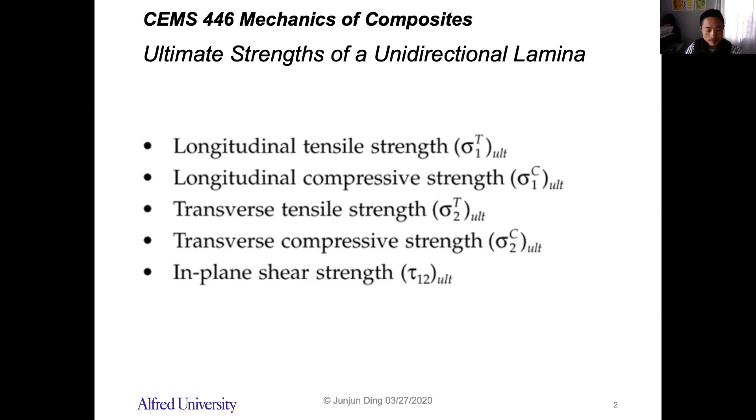Now we assume the fiber and matrix are both isotropic and homogeneous and linearly elastic until failure. That's the assumption for this model.

The failure strain for the matrix is higher than the fiber, which is the case for most polymer matrix composites. For example, for glass fiber reinforced epoxy composite, the glass fiber fails at a strain around 3 to 5%, while the matrix material, epoxy, fails at a strain around 9 to 10%.

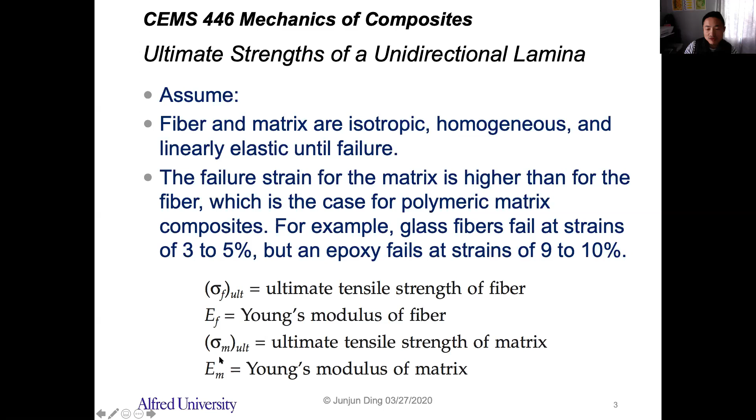So usually for the polymer matrix composite, the maximum strain for the fiber is smaller than the maximum strain for the matrix. We show the ultimate strength for the fiber expressed in this way, along with the Young's modulus of the fiber, the ultimate tensile strength of the matrix, and the Young's modulus of the matrix.

You'll see that the maximum strain that can be applied to the composite and the fiber is the same, because if the fiber fails, the composite fails. That's why the maximum strain for the fiber and the composite is the same as the ultimate strain of the fiber.

While the matrix has a much larger ultimate strain, that is usually true for most composites, especially polymer matrix composites. Now what about the stress for the composite, fiber, and matrix?

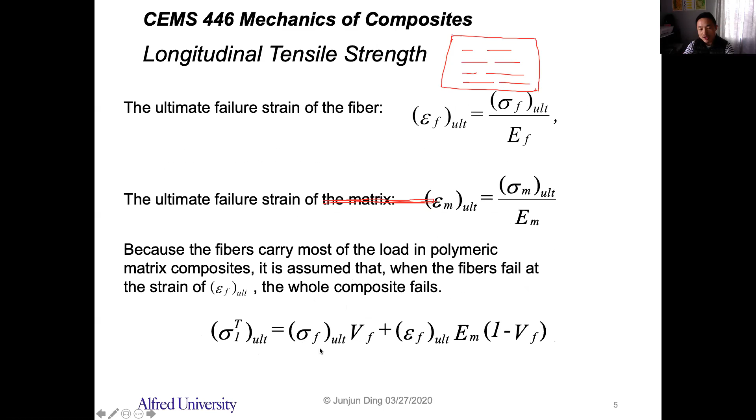So we have to compare with those two. This is the case after the fiber fails, this is the case before the fiber fails. So we want this one to be larger than before the fiber fails. Therefore you can calculate the volume fraction of the fiber. The minimum volume fraction of the fiber can be expressed by the ultimate stress of the matrix, ultimate stress of the fiber, Young's modulus of the matrix and the fiber.

Is that right? So the key is that if you want to find out if the composite can take more load after the fibers are broken, you have to derive it based on this equation, this relation. This relation means the composite can take more load - this is higher ultimate strength after the fiber breaks, this is the ultimate strength before the fiber is broken.

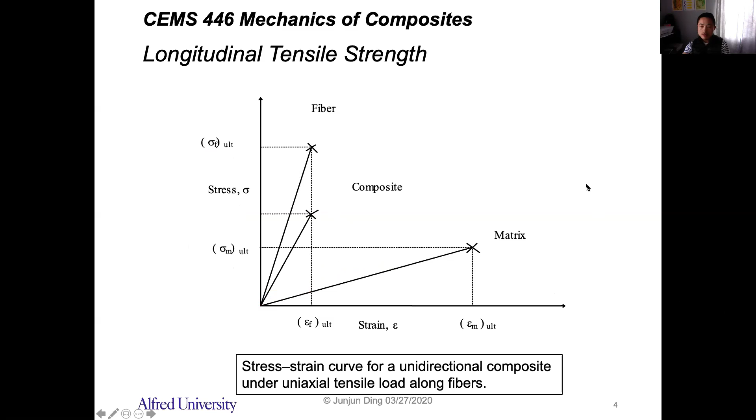So there's a critical volume fraction of the fiber that has to be reached to effectively increase your ultimate strength of the composite. So if we compare this ultimate strength of the matrix and the ultimate strength of the composite, if the ultimate strength of the matrix is larger than the composite, that is bad. So in this way, we can calculate this critical fiber volume fraction based on this equation.

Is that right? If you want the ultimate strength of the composite to be higher than the ultimate strength of the matrix, you want your volume fraction of the fiber larger than the critical volume fraction of fiber. Is that right?

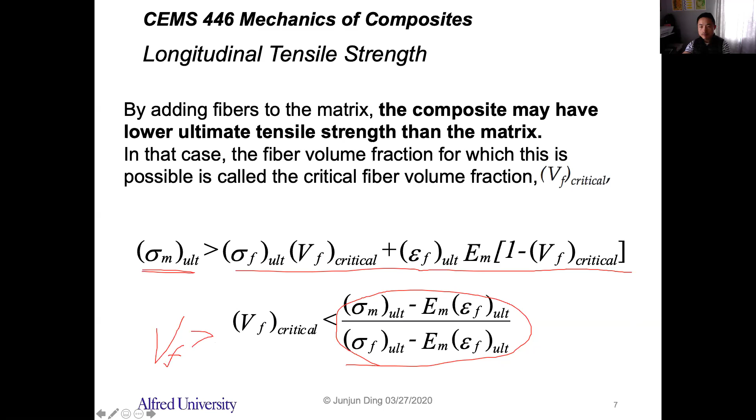Okay, so now let's look at the example. First of all, I want to show you guys the typical properties of fibers: graphite, glass, and aramid fiber. You can find the axial modulus, transverse modulus, Poisson's ratio, transverse Poisson's ratio, shear modulus in the axial direction, coefficient of thermal expansion in both directions, tensile strength in axial direction, compressive strength in axial direction, tensile and compressive strength in the transverse direction, shear strength, and specific gravity. So it's most of these physical properties of fibers.

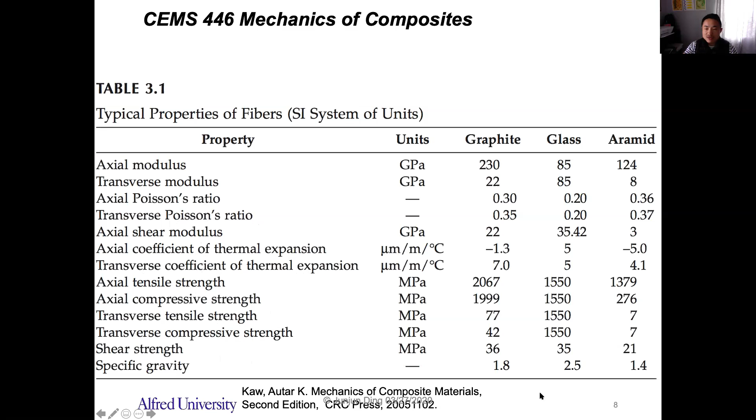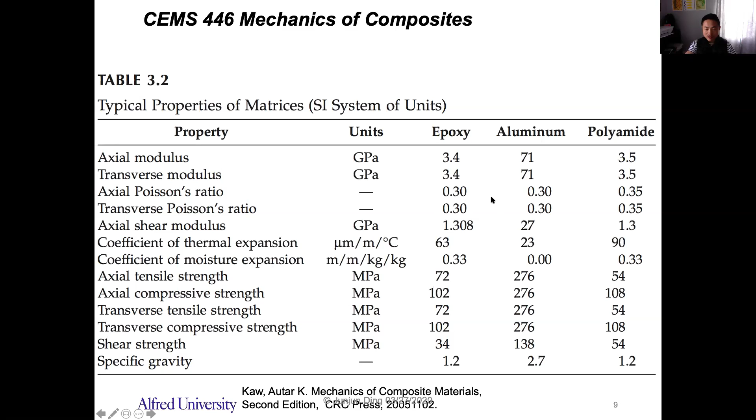And this is the typical properties of matrices: epoxy, aluminum, and polyamide. So now we also have these physical properties of the matrix. Based on these physical properties of matrix and fiber, we want to solve this example.

Okay, let's see what this question is. We want to find the ultimate tensile strength for a glass epoxy lamina with a 70% fiber volume fraction. Use the properties for glass and epoxy from the previous tables, and find the minimum and critical fiber volume fractions.

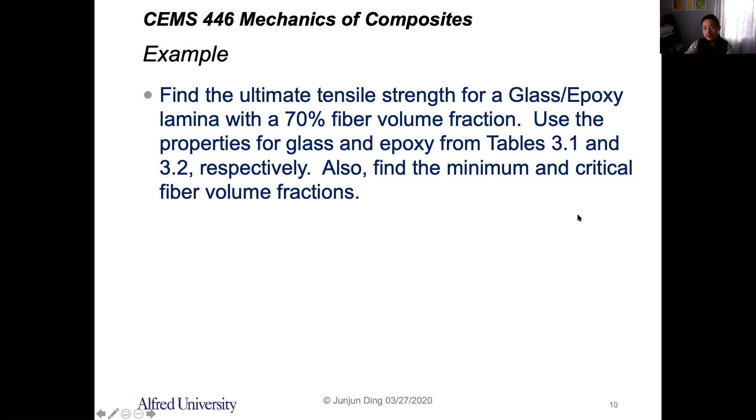You can try to solve it yourself. All right, to save some time, let me continue on how to calculate this. Okay, so first of all, you want to calculate the ultimate strain of the fiber and the ultimate strain of the matrix to see which one is larger, because we know the Young's modulus of the fiber, Young's modulus of the matrix, ultimate stress of the fiber and the matrix. Then you can find out the ultimate strain of the fiber and ultimate strain of the matrix.

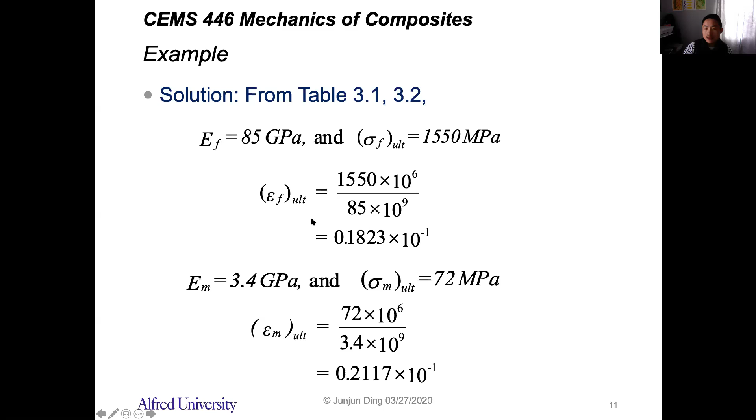So you see this ultimate strain of the fiber is lower than the ultimate strain of the matrix. That means the fiber will fail first, right? So that means the ultimate strain of the composite will be equal to the ultimate strain of the fiber. So that's the ultimate strain of the composite.

So you use the ultimate strain of the composite to calculate the ultimate tensile strength. The ultimate tensile strength will be equal to the ultimate stress of the fiber, because the fiber will fail first, times the volume fraction of the fiber, and the ultimate stress applied to the matrix at that time has to be calculated based on the strain applied to the matrix, because the strains are the same. You use the strain and the Young's modulus of the matrix, that's the stress applied to the matrix. So in this way, you can calculate the ultimate longitudinal tensile strength.

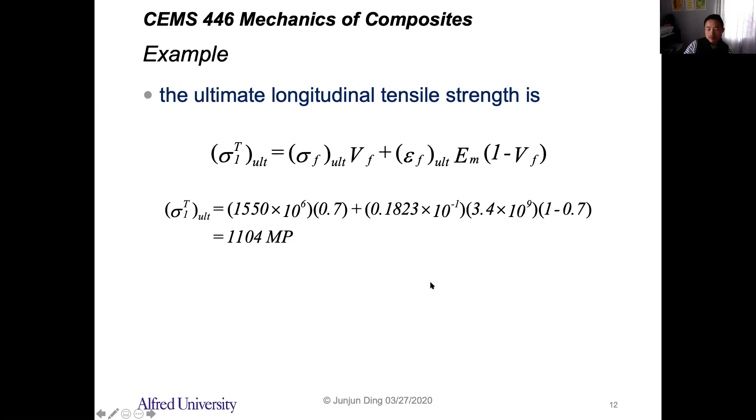Okay, so to calculate the minimum fiber volume fraction, we simply apply this equation, or you just use the relation between the ultimate strength of the failed composite and the ultimate strength of the composite, to see before the fiber fails, which one is larger. So based on this equation, we find the minimum volume fraction of the fiber is around 0.6422%.

So that means if the volume fraction of the fiber is less than this value, the matrix can take more loading after all fibers break. So that means the volume fraction of fiber has to be extremely small if you want the matrix to take more loading after all fibers break.

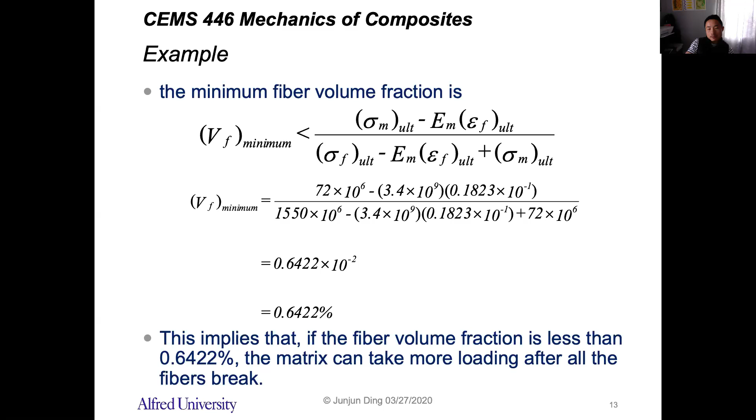So to calculate the critical fiber volume fraction, use this equation we just derived, and you can find the volume fraction is 0.6732%. It's also really low. So what does it mean? That means if the fiber volume fraction was less than this value, the composite longitudinal tensile strength will be less than that of the matrix. So here, because the ultimate strength of the fiber is way larger than the ultimate strength of the matrix, if you have the volume fraction of the fiber larger than this value, that means the composite tensile strength is larger than that of the matrix.

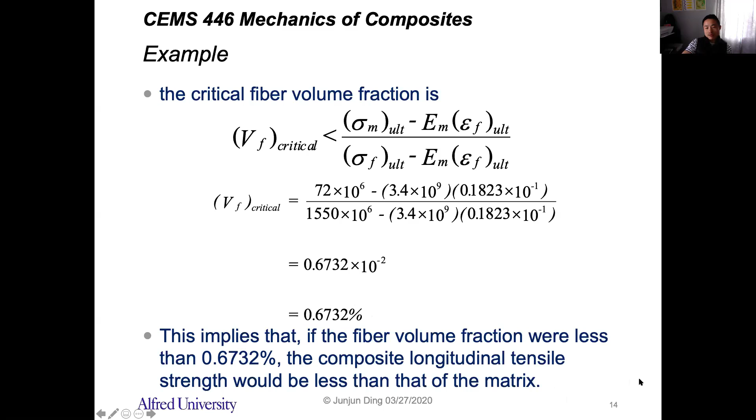If you want to use the experiment to check the ultimate strength, you can use this tensile with a mechanical tester to pull this dog bone shape of the composite. In this way, you can directly measure. You can use the strain gauge to measure the strain on the composite, and this stress can be measured by this machine. So in that way, you can measure the ultimate stress of the composite in the longitudinal direction.

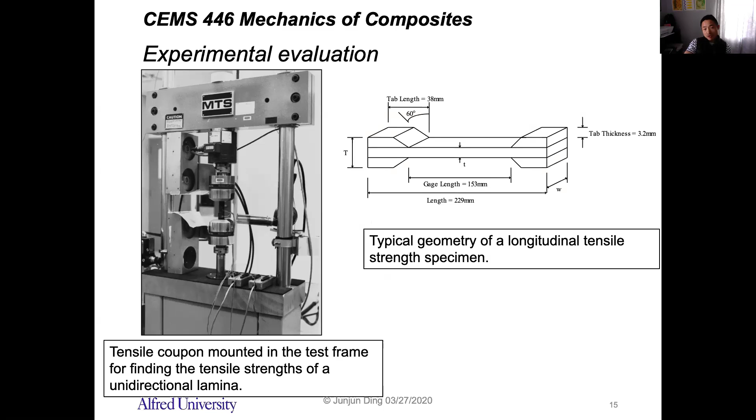So this is the typical stress strain curve of the laminate under longitudinal tensile load. This is the experimental data. In this way, you can easily find out the Young's modulus, because Young's modulus is actually the slope of this curve, this linear curve. And the ultimate stress is the maximum stress shown here, and this is also the maximum strain. It should be a straight line. So to measure them experimentally is really easy to get a stress strain curve.

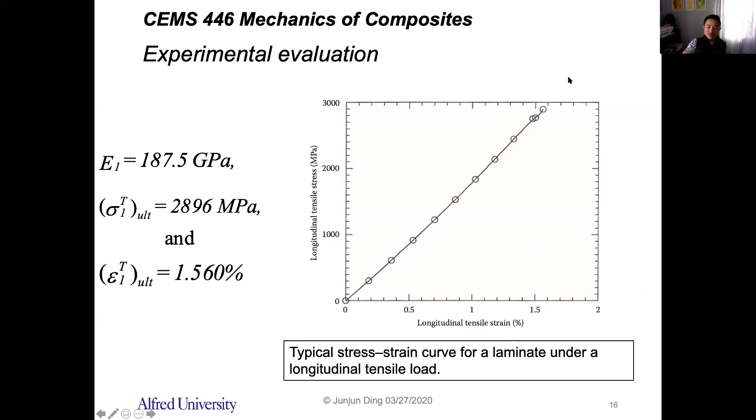So for the longitudinal compressive strength, usually the composite, the unidirectional reinforced composite, you don't want those composites to withstand compressive strength. But in some cases, they have to withstand the compressive strength.

For example, if you have this composite, this lamina, and you have this fiber, reinforced fiber, unidirectional fiber in this way, sometimes you may want to have a hole inside, and you may want to use a pin to hold this hole. You may want to use a pin to put inside to hold this piece, and this pin will compress with one side. And therefore, at this area, this composite will withstand compressive loading rather than tensile loading. So that's why we want to look at this longitudinal compressive strength.

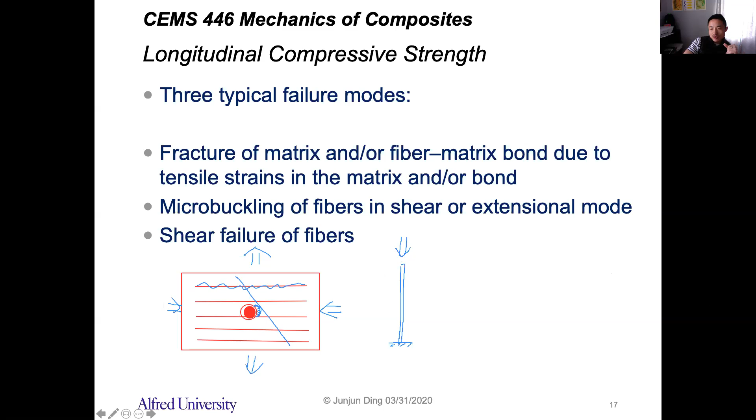Okay, so we have a schematic on the mode of failure on the compression. So A and B are the microbuckling failure mode. It depends on the density, the volume fraction of the fiber. If you have a low volume fraction of the fiber, you may have this extensional mode. If you have a high volume fraction of the fiber, this microbuckling may happen in the shear mode.

And this is the transverse tensile failure of the matrix, so you have this fracture or cracking in the matrix. And shear failure of the fiber happens because of the shear loading applied to the fiber. So that's the 3 or 4 failure modes on the compression.

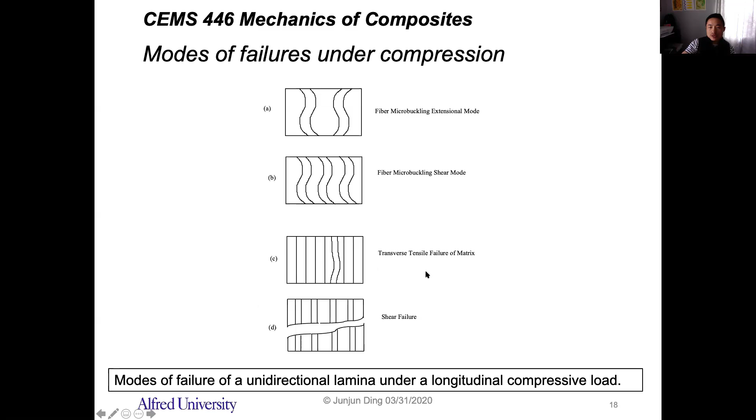So assuming you have one applying the longitudinal compressive stress, you have this ply applied with the longitudinal compressive strength. So the strain by the compressive stress will be calculated by the compressive stress and the Young's modulus of the material. That's the deformation, that's the compressive strain in one direction, that's the longitudinal direction.

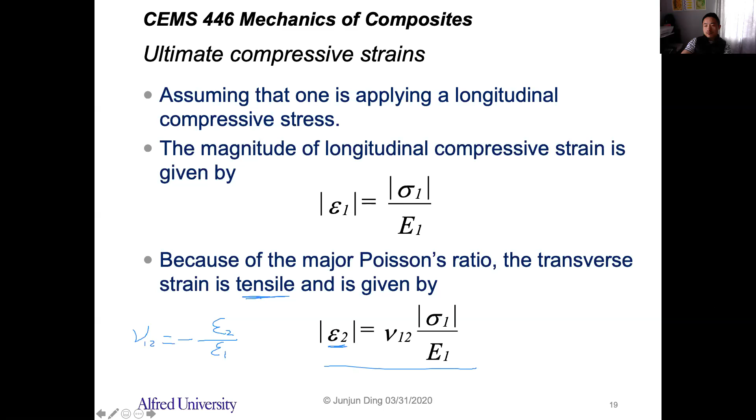So you can calculate the strain in the transverse direction based on the Poisson ratio. We know the Poisson ratio 1,2 equals to minus strain in the two direction over strain in the one direction. So the strain in the two direction, which is the transverse direction, will be equal to minus strain in the one direction times Poisson ratio 1,2. To make it easier, we consider all the strain stress as positive numbers. So the transverse strain will be tensile, this is a tensile strain. And that means this value should be positive. You can calculate it based on the stress that is applied to the composite.

And therefore, you can use this strain based on the maximum strain failure theory. That means you don't want this strain in the two direction exceeding the ultimate strain in the two direction. So by using that maximum strain, you can calculate the stress that can be applied in the one direction. So let me draw this.

So this is a unidirectional composite, right? This is one direction, and this is the two direction. If you apply the compressive force here in the one direction, you will have deformation in the two direction. So if you have a maximum strain, or the ultimate strain, in the two direction, you don't want to exceed that, if that's the failure mode, which means the matrix, or the matrix and fiber bonding, fails.

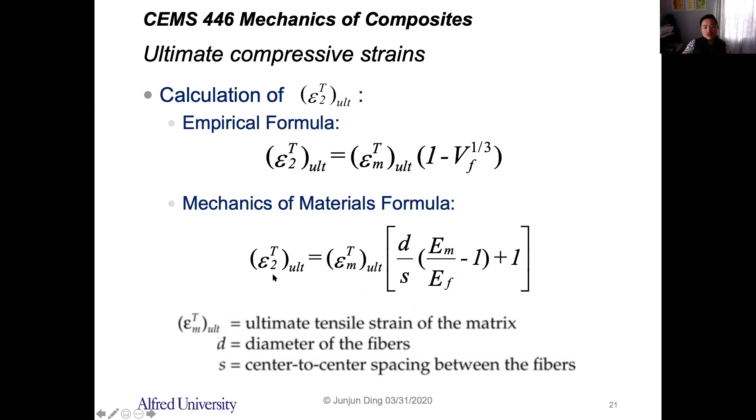You can also get this ultimate strain from the mechanics of materials formula, which is calculated based on the ultimate strain of the matrix, the diameter of the fiber, the center-to-center spacing between fibers — this is the arrangement of the fiber — and the Young's modulus of matrix and Young's modulus of fiber. You can calculate the ultimate strain in the two direction, and use that in this equation to calculate the ultimate stress that can be applied in the one direction.

Okay, so that is the case for failure mode A.

For the microbuckling failure mode, we have two cases. One is the extensional mode, the other is the microbuckling mode, the shear mode. That is because the adjacent fibers in the composite may buckle independently, or they may buckle in a cooperative manner. Case B is the case where the fiber buckles independently, and this is the case where fibers buckle in a cooperative manner.

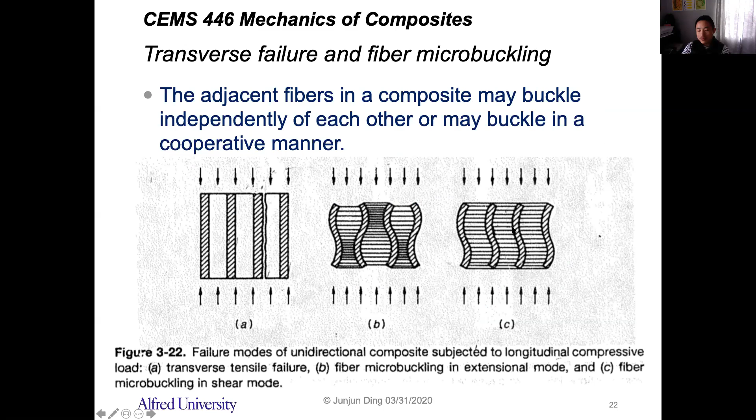For case B, the transverse deformation of the fiber is out of phase relative to each other. The resulting strains in the matrix are predominantly extensional, and that's why this is referred to as the extension mode. This is the case when the interfiber distance is quite large, meaning the volume fraction of the fiber is very small.

In case C, if you have a higher volume fraction of the fiber, the transverse deformations of the adjacent fibers are in phase with each other, so the resulting strains in the matrix are predominantly shear strain. That's why this mode is called the shear mode. It depends on the deformation of the matrix.

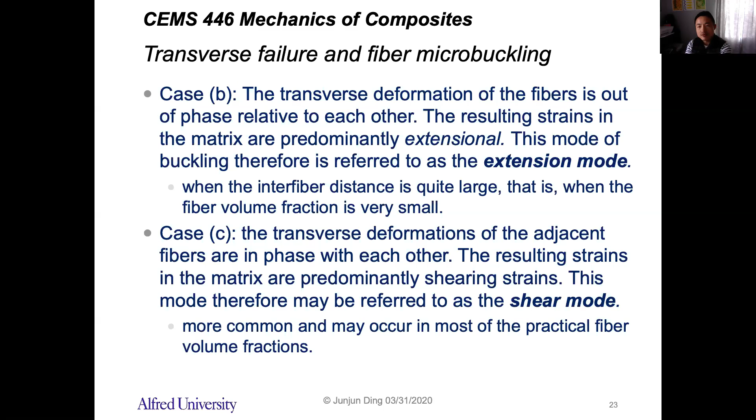So this is the experimental result. This is an SEM image, I believe, for the two buckling modes — in the A and B case. The distance between those two fibers is around 3D, where D is the diameter of the fiber. In the B case, the distance is 10D, which is still relatively small compared to the diameter of the fiber.

So in those two cases, the microbuckling is in the shear mode, meaning the matrix in between will experience shear deformation. If this distance is really large compared to the diameter of the fiber, those microbucklings are not in phase — they're pretty much random — so the matrix in between will experience extension deformation.

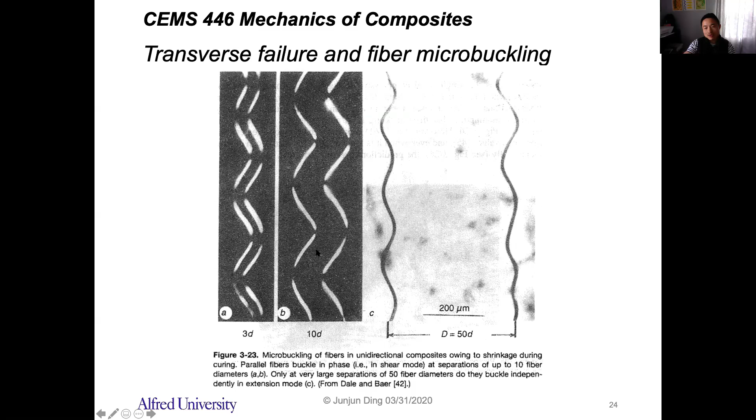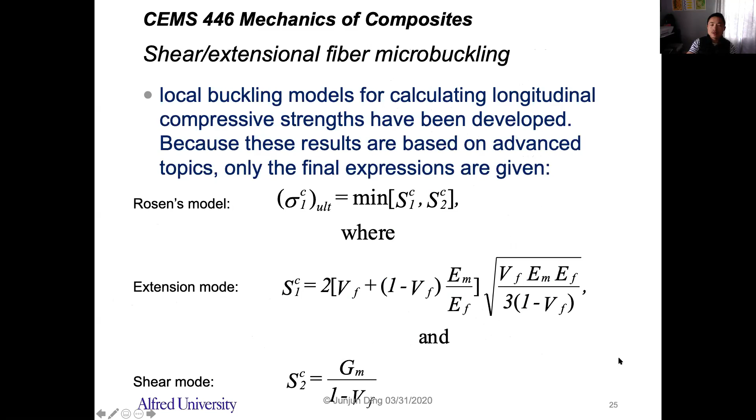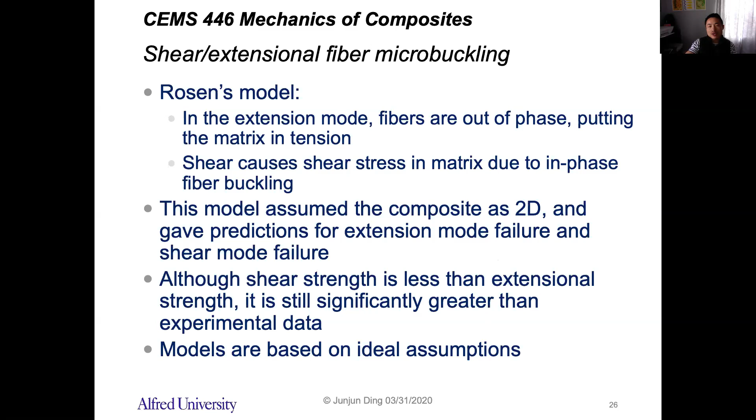But still, this model is not perfect. There's a lot of assumptions here, and you may find this model doesn't work really well with the experimental data. There may be other models for more precise prediction. This model assumes the composite as 2D, and it gives the prediction for extension mode or shear mode failure. Although the shear strength is less than extensional strength, it's still significantly greater than the experimental data, since it's based on ideal assumptions. But it's a great way to predict whether you will have shear fiber microbuckling or extensional fiber microbuckling.

The third and last failure mode is called the shear stress failure of fibers. In this way, a unidirectional composite may fail due to direct shear failure of fibers. In this case, the rule of mixtures gives the shear strength of the unidirectional composite - you can calculate it in terms of the shear strength of the fiber and shear strength of the matrix. In order to have shear stress failure, you want to have both fiber and matrix fail. So here you have ultimate strength of the fiber and ultimate shear strength of the matrix, and you can therefore calculate the ultimate shear strength of the composite based on the rule of mixtures.

So the maximum shear stress in the lamina under longitudinal direction compressive load happens at 45 degrees, and it's around the ultimate strength over 2. That will contribute to the shear stress in the composite - so you have compressive shear stress in one direction. However, that contribution to the shear stress tau 1,2 is only half of the normal compressive stress. So therefore you can get the relation between the normal compressive stress in terms of shear stress of fiber and shear stress of the matrix. This is when you have the shear stress failure - you can calculate the ultimate stress in this way.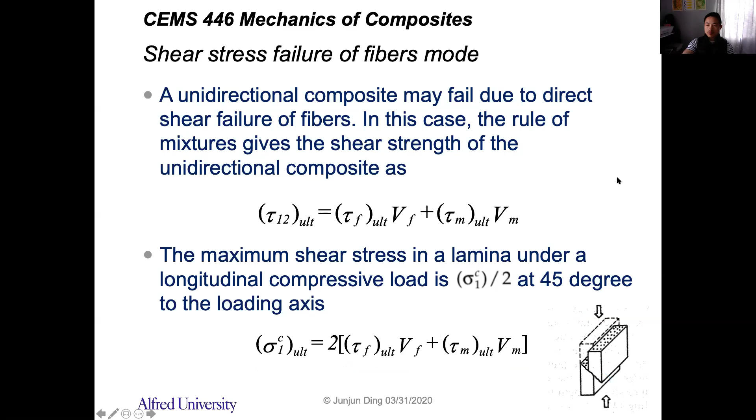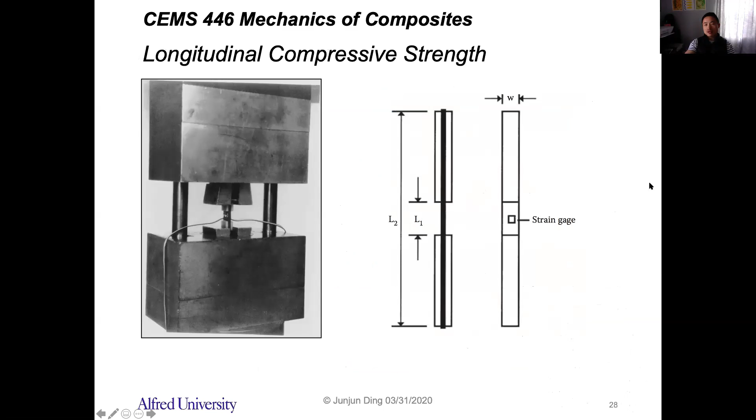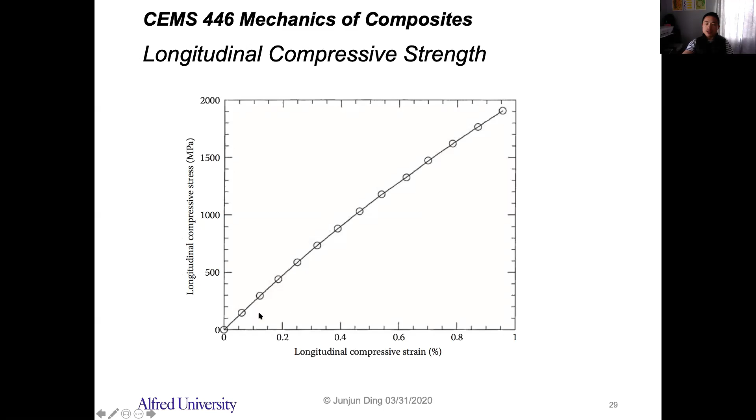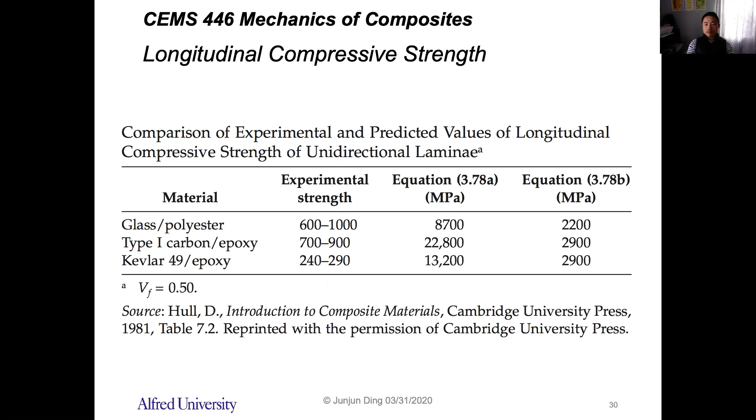You can also measure this compressive strength experimentally. This is a typical longitudinal compressive stress versus strain curve - it's pretty much a linear curve before failure. Here are some examples of experimental strengths compared with equations calculated based on the models we developed. You see there's a big difference between the experimental strength and the model-predicted strength. Usually the experimental strength is much less than the theoretical strength, because the composite is not perfect. So there are a lot of factors that contribute to this big error.

Irregular spacing of fibers will cause premature failure in the matrix-rich area - if you don't have good dispersion of the fibers in the matrix, you will have a matrix-rich area, and that area will be the failure point. You may also have less than perfect bonding between the fibers and the matrix - if the bonding is not good, that's the failure point. And you may have poor alignment of fibers, in which case you will not have strong reinforcement in the axial, longitudinal direction. Also, those models didn't account for the Poisson ratio mismatch between the fibers and the matrix, and they're also not accounting for the transversely isotropic nature of the fibers.

So that's it for today's lecture. It's a little bit more than the usual lecture, and we covered some of the failure modes, which is usually covered in chapter 12, I think. So it's a little bit more than the normal micromechanics. I hope you guys can, after watching this video, take your time to read the book, and then let's work on the homework.